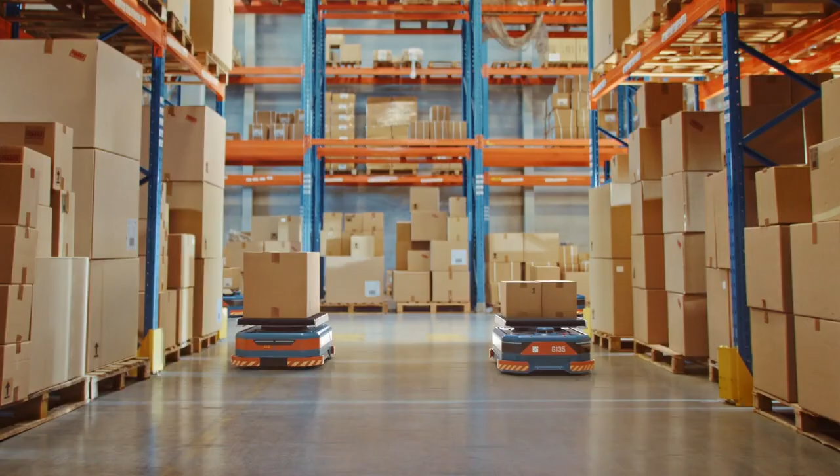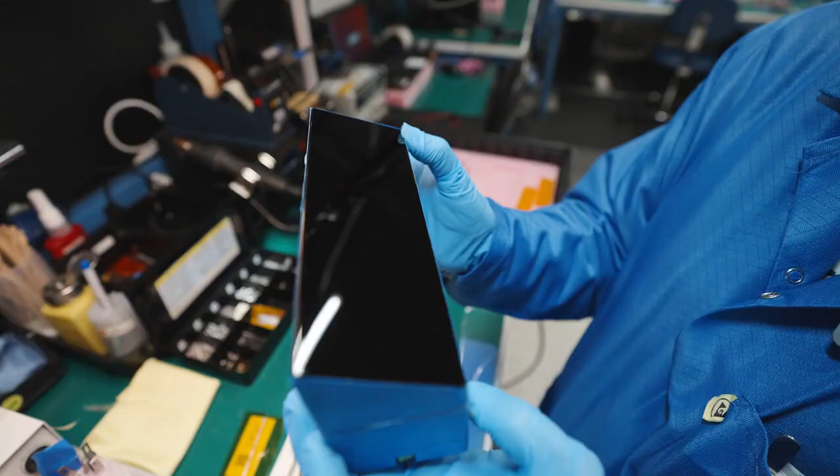The answer is this piece of LiDAR technology right here, the Velarray M1600. The M1600 provides outstanding near-field perception and safe navigation for all kinds of applications, from industrial robotics and last-mile delivery to smart cities and manufacturing. The M1600 is a result of countless hours of brainstorming, designing, testing, prototyping, doing more testing, and not settling until

we met our expectations. The goal of the M1600 was to design a compact directional LiDAR with a wide horizontal field of view plus a larger vertical field of view than our previous sensors.

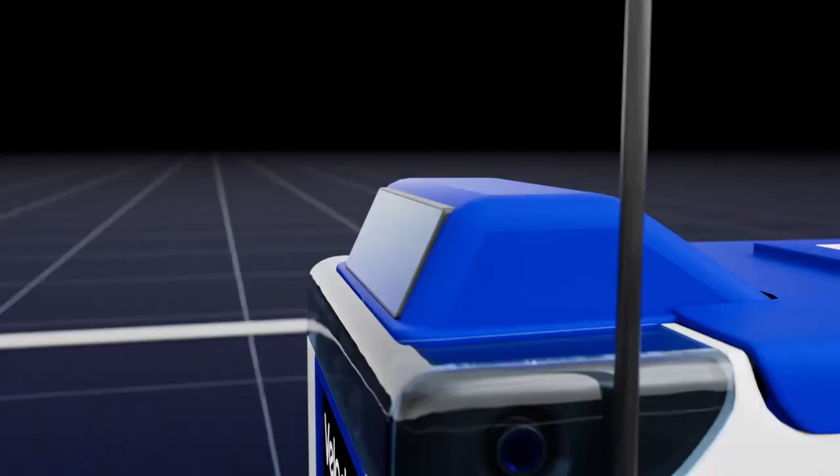This sensor can capture incredibly rich data of the surrounding environment starting at just 0.1 meters and extending out to 30 meters, all with an accuracy of a few centimeters. It also has a broad 32-degree vertical field of view, which is the best in its class.

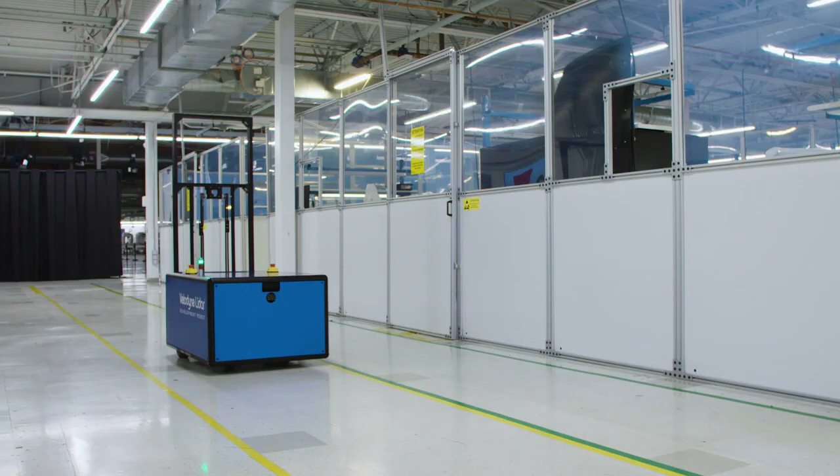It consumes less than 11 watts of power, and it's ideal for any environment, whether that's indoor, outdoors, day or night. And less power consumption extends operating range and increases efficiency. All of this allows for safe operation in complex environments like warehouses, industrial sites, or crowded sidewalks.

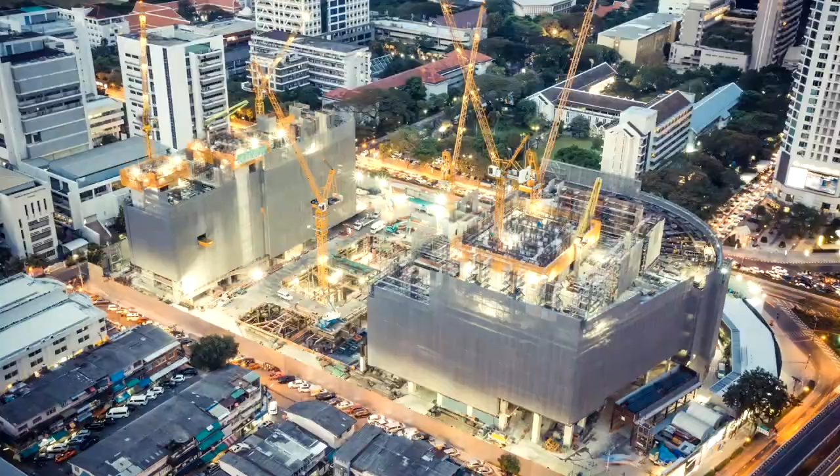The M1600 simply covers more space, so you no longer need to stack up multiple sensors to get the job done. And then there's the design.

The M1600 is sleek and compact, which makes it super embeddable and a perfect fit for external mounting. It also has a streamlined single connector for even easier integration. And it's really tough. This sensor is industrial grade and can handle just about anything thrown at it.

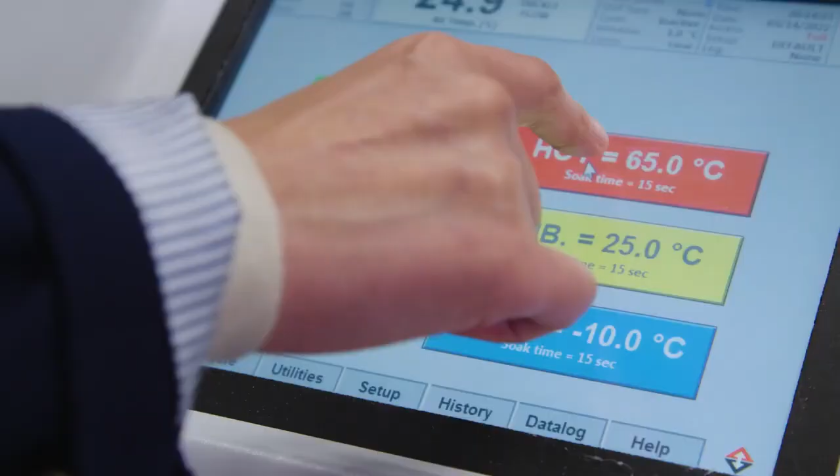We test our M1600 LiDARs across different environmental conditions to make sure that they can survive different temperature extremes, different humidity levels, and different road conditions.

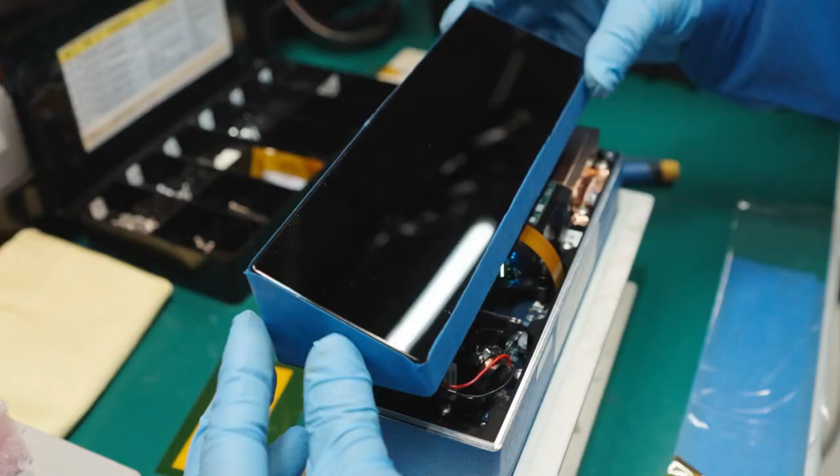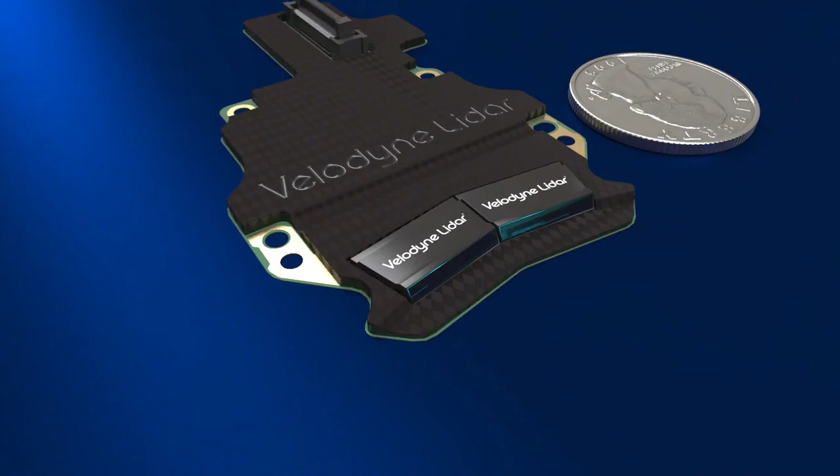And the inside of the sensor is just as groundbreaking. The M1600's core is built using Velodyne's breakthrough micro-lidar array architecture (MLA). In a nutshell, it's a game-changing optical chip technology that enables miniaturization of LiDAR channels, which are essentially laser engines. This miniaturization, combined with Velodyne's proprietary, fully automated manufacturing process, enables a cost-effective solution that's ready to scale up.

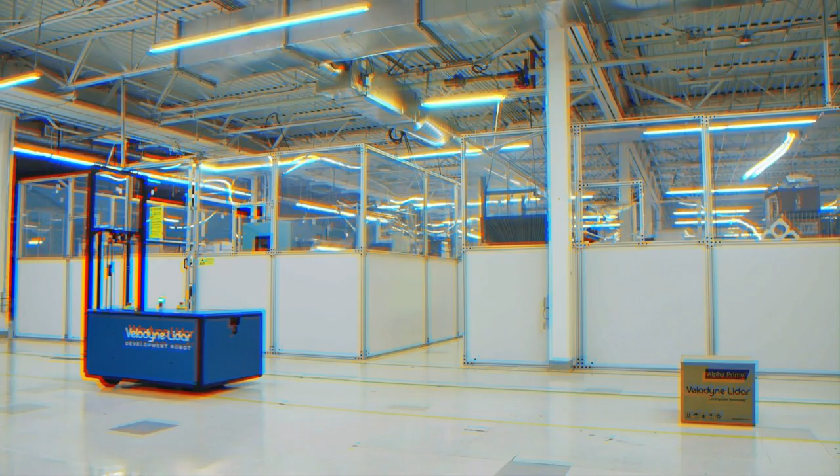But we're not just talking about hardware here. We see the future of Velodyne as an end-to-end solution that enables machines to see, understand, and act on their environment. That's why we're focused on integrating sensors like the M1600 with our Vela software.

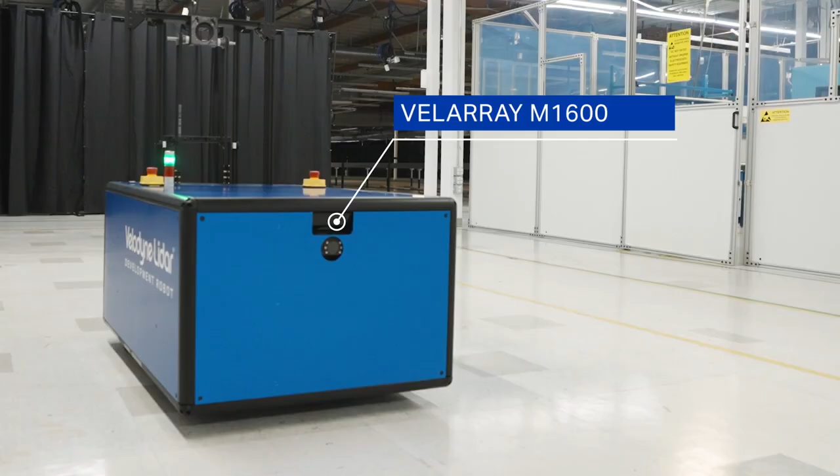Vela software can turn raw LiDAR point cloud data into meaningful perception outputs. Think of the M1600 LiDAR sensor as the eyes and our Vela software as the brain. The 3D point cloud generated by the M1600 can be seamlessly processed by Vela to enable robots to traverse unstructured and dynamic environments. The sensor collects the data, and the software tells the robot what it is seeing.

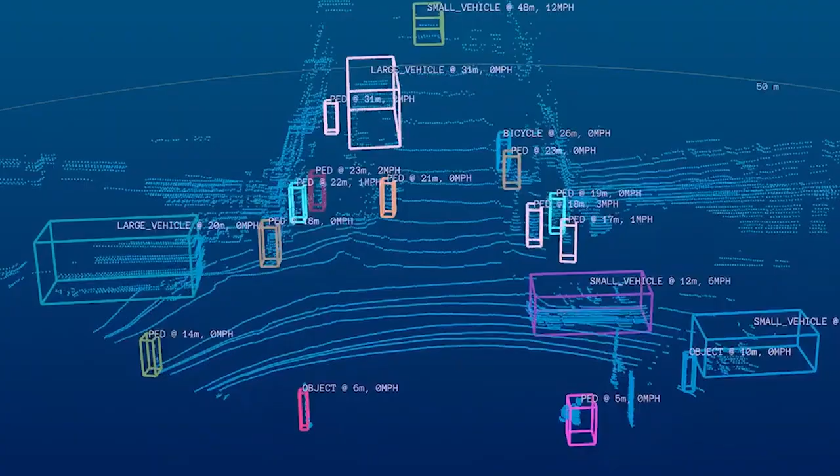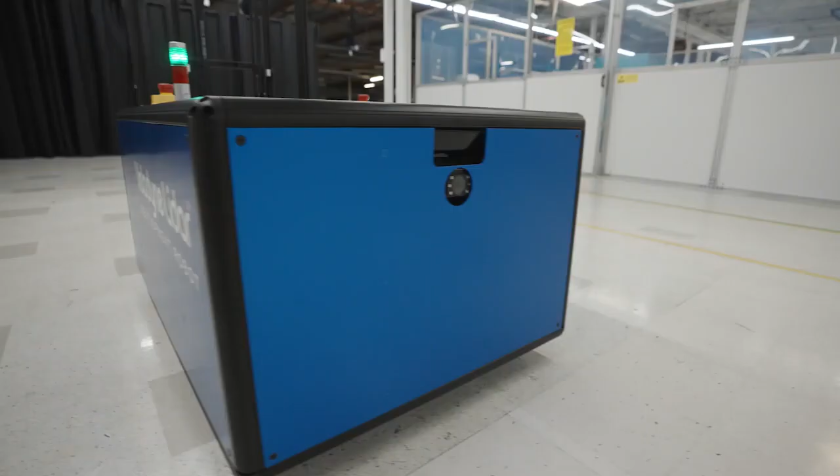With the integration of our LiDAR hardware and Vela software, it frees up our customers to focus on their own applications. This really speeds up deployment of autonomous solutions and can help customers get to market faster. So the integration of the M1600 and Vela unlocks all kinds of possibilities. This is the one-stop shop LiDAR solution for any robotic or industrial application. It's truly the start of a whole new chapter for Velodyne and the LiDAR industry.